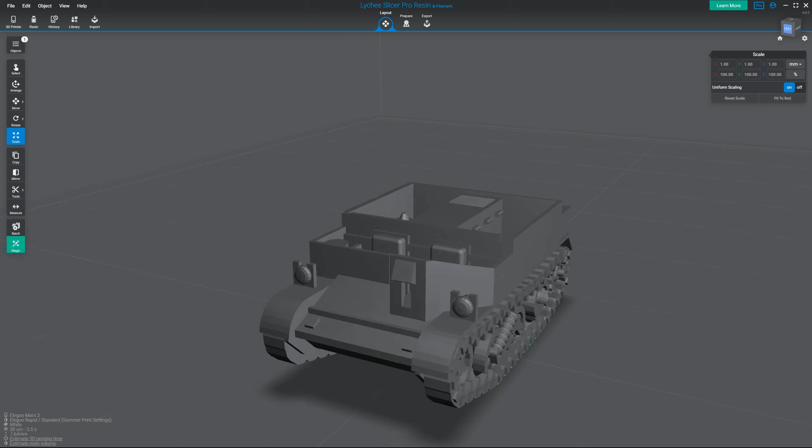On the screen in front of me I've got Lychee Slicer open, but everything I'm going to do today you could do in Chitubox if you use that program. What we have in front of us here is not one of my creations. This is a Universal Carrier by Wyndham Graves.

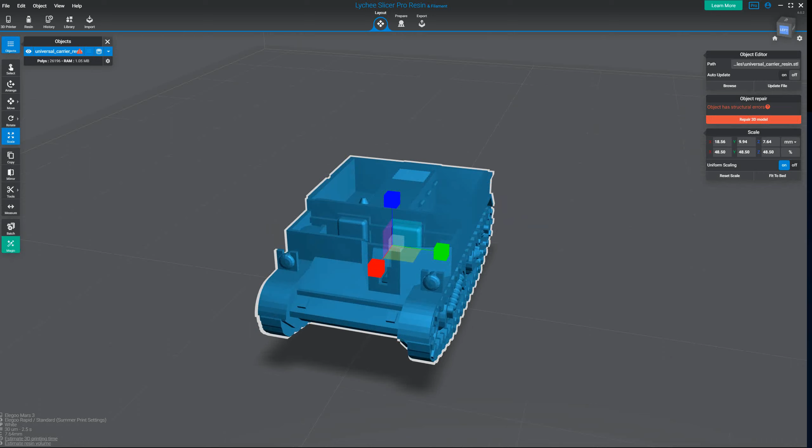I will put a link to the model in the description. I can't remember the exact name he has it under, but it's something like Easy Print Universal Carrier. It's in 1/100 scale natively, so I've put it to 48.5% to match my figures. This works out at 1:206, something like that. So this isn't 1:285 scale. That would need to be smaller than this.

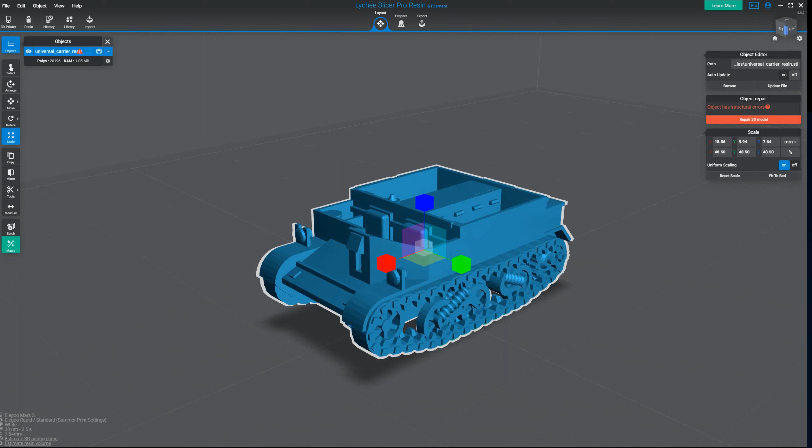But this is the most straightforward way to show you the figures without me having to downsize them as well. So my figures are 7mm from the bottom of their boots to their eye lines. I did the maths, and this works out at the right scaling from 1/100 to match that. But if you're dead set on 1:285, you can do the mathematics to scale the figures and vehicles around that.

Anyway, I'm getting a little off topic. What I'm going to do is add some crew members to this Bren carrier. It's my first time doing it, so I hope it works despite me being unscripted.

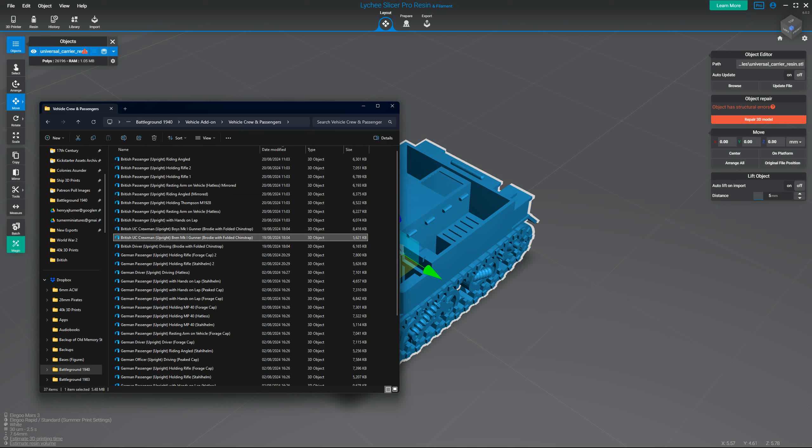So here is the contents of my vehicle crew add-on. I'm going to drop in a Bren gunner for the Universal Carrier there. And I'm going to drop in a driver. And I'm going to drop in passengers. Angled passengers are the ones that should fit in the Bren carrier in the back. Where's the mirrored one? There's the mirrored one.

Okay, hopefully this should be everything we need to get this all crewed up. So just going to put this in the middle. And we're going to want to rotate these guys 90 degrees. Yeah, that looks right. So what we're doing is positioning these guys in the vehicle, and then we're going to export them all together as a joint STL. This is going to be done by eye, not scientific, so there will be a bit of room for margin of error.

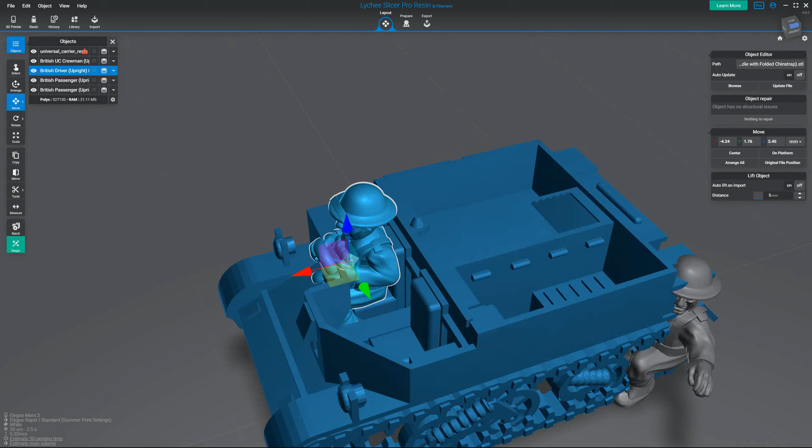Now, I think you'll want to look under the vehicle from time to time to make sure the feet aren't clipping through, but if the feet get eaten by the bottom of the vehicle, I don't think that really matters. About there looks right to me.

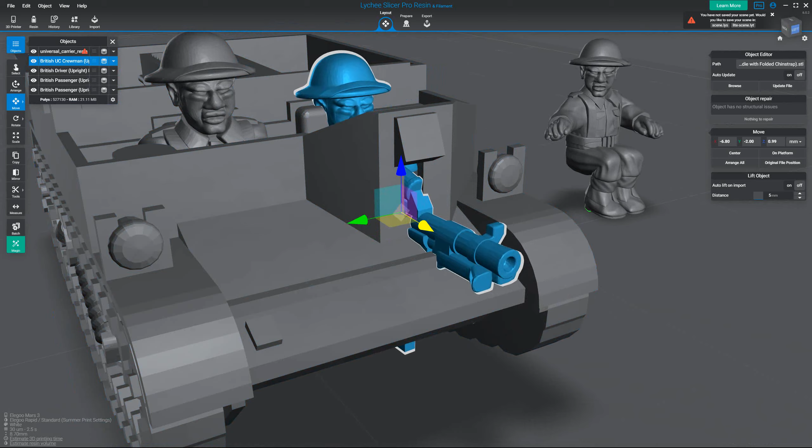Okay, now we're going to move in the Bren gunner. With the Bren, it's pointing 5 degrees to the left, so you don't need to be dead on center. That's just so that the butt doesn't look weird. I wanted to have more room to work with the butt. Because the size of the weapons is a little exaggerated, it isn't quite a perfect lineup.

Again, you can just rescale the figures. About there looks right. I'll want to make sure he's about level with the driver though, or I can bump the driver up to be a similar height to him. Actually, that looks okay. So there's our driver and gunner.

And now this is the bit I'm worried about, because I have to confess I've not actually fit these in yet, so this is the first time doing it. I might have to make tweaks to these STLs. Let's do him 45 degrees. Yeah.

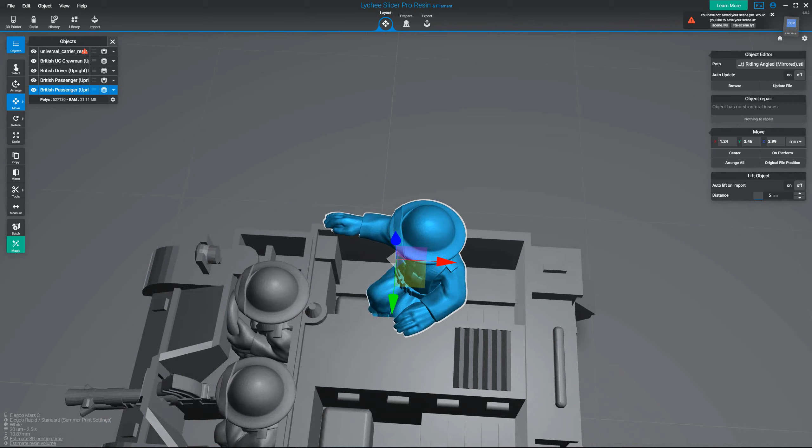I'm sure someone who knows more about universal carriers than me is going to be fretting that they're sitting on something sensitive or whatever. The Warlord Games model for a Bren carrier has them sitting here, but I see that there's actually a box in the way there.

Might need to revisit the drawing board with this one. I promise in the final project I will have the arms positioned correctly for the Bren carrier. I did actually pose this on a Bren carrier model, but it was a different one. I think he'll need some new legs. But let's just pretend this guy fit properly, and I will have this fixed ahead of the final Kickstarter.

I wonder if I sat like that, if he was sat on the other side. No, I think the way it is, yeah. Probably burning his hand on an engine cowling there, but... like so.

Someone better at maths know how I get the 45 degrees from there? Is that about it? 45 plus 1. I don't know, I'm doing it by eye because I don't want to waste your time getting me to just watching me be confused, which is about 90% of the videos I make, to be fair.

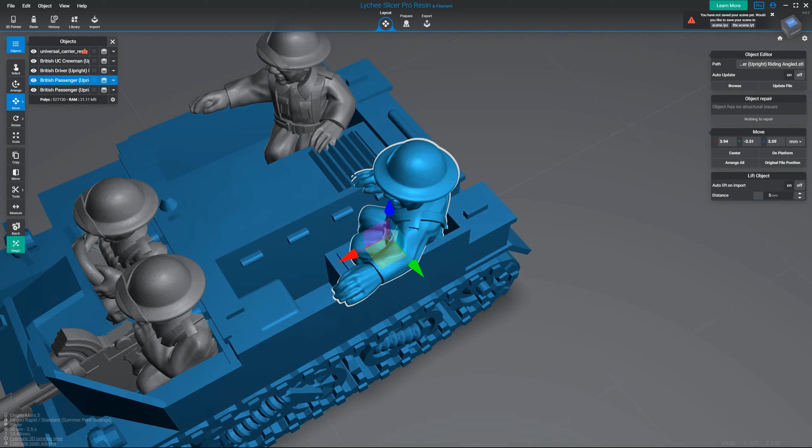Okay. We have got other sitting figures. I see there are some seats there. I'm really betraying my lack of knowledge with Bren carriers, I suppose, but if we were to put in, say, this one - this is intended more for a truck, but I don't know if this would be good for a Bren carrier if we had this guy here.

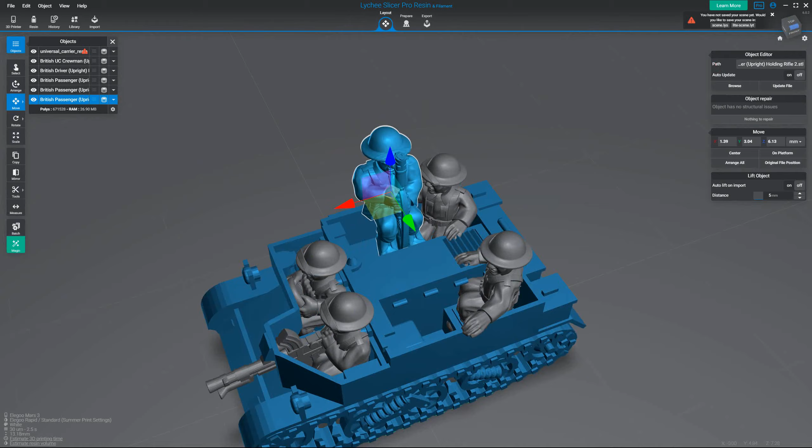Someone who knows what they're... oh, hello, we have two very friendly guys here. We could do it like that. But since I don't really know about these, I think I'll have to revisit the drawing board with the passengers. We can just remove the passengers and I will export like this.

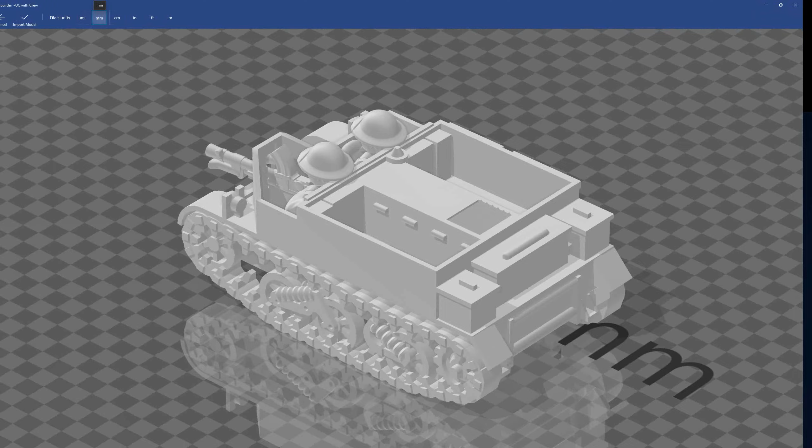So, very similar steps into your toolbox. If we decide, oh yeah, we like this vehicle with our crew, we just go and export. Export to 3D file. Desktop, UC with crew. And then if I go to the desktop, hopefully you can still see this, open this up in 3D Builder. There we go, and when I make sure millimeter is selected, click import model, I can repair it from here.

Not sure if this is necessary, but this will merge them as a single STL. But there you go, that's how we get a vehicle with a single crew. How about I show you a German vehicle now? Even more scope for things to go wrong.

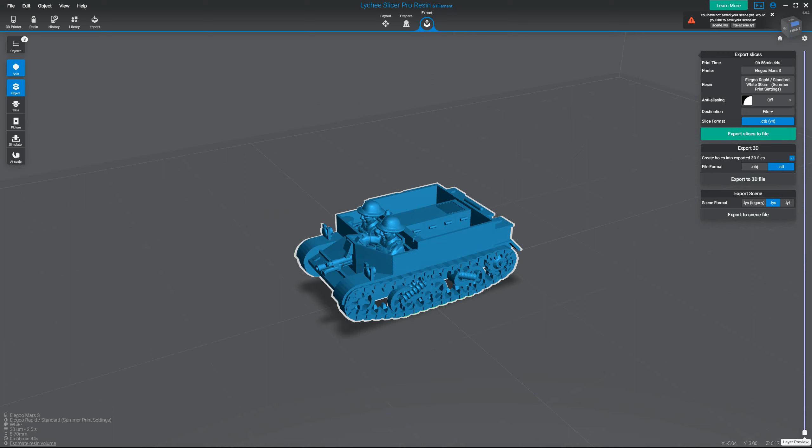Let's bring up my files. And if I go on Dropbox: West, Flames of War, Team Yankee, World War II, Tiger Race, Hanomag pack. Yes, this is what I want. Okay, so let's get rid of our British boys here, and drop in our half track.

And scale again to 48.5%. There we go. Be careful with this Tiger Race model - I don't know if this will show up on a print, but it's got these loose bits of something here. In my Blender file where I was making these, I deleted those, but I forgot to update this STL.

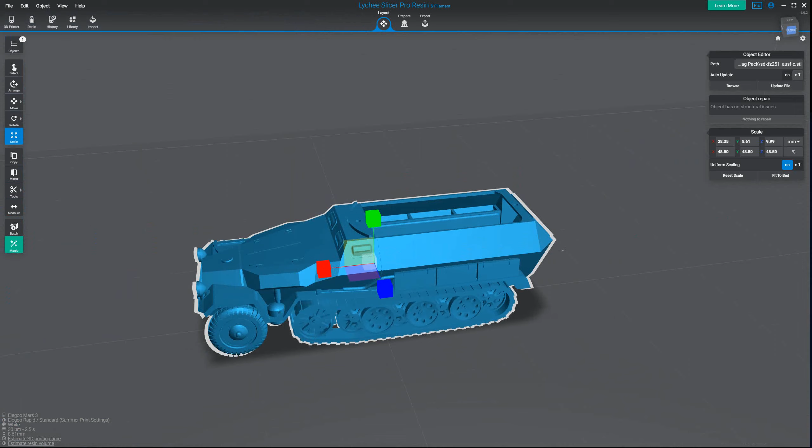We want crewmen for this, so if I go down to Germans, I've got German half-track gunner. And then, where's the driver? Driver - I've got forage cap driver there, but want him with the helmet on. He is going into battle after all. Here's our driver. Okay, import, rotate 90 degrees.

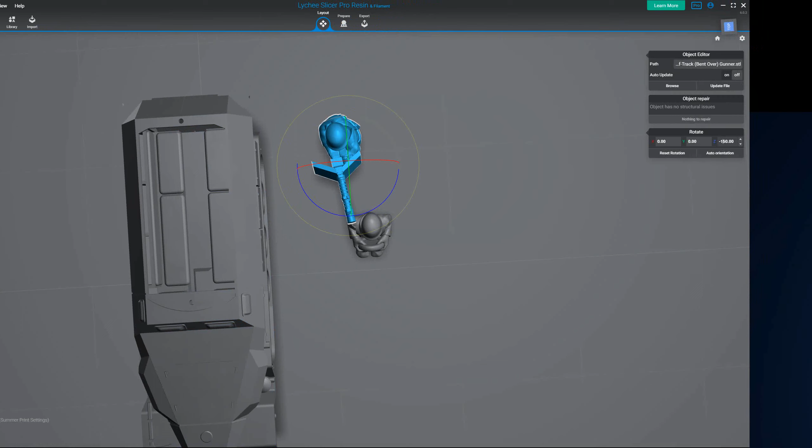And that's 155. Oh no, 155. 160. Just trying to get the gun straight. Ah, there we go, 160.

Now, this is actually my MG model using the gun shield from this original. Again, this is the Hanomag pack from Tiger Race, which I am using with permission. Mr. Wyndham Graves, I actually need to contact to ask him if I can use this Universal Carrier model. If he says no, I guess I'll have to delete this video.

Priorities, Henry. Should have done that first. We just want to make sure that this is clipping into the model just so it will print supportless.

It's difficult to see if the peg's properly lined up there. But good enough for now. So there's our gunner mounted on the top.

Yep, and driver, just insert him in. What side did Germans drive cars on again? It's the left, isn't it? Yes. I hope that's right.

Just get him so that the helmet isn't cropping through. To be honest, you're going to need to be quite the painting master to get your brush in there, aren't you? But yeah, there's our driver.

And we can add in some passengers. German passenger. Pose number 2 has them with the rifle between their legs. Pose number 1 has them holding it in their left hand.

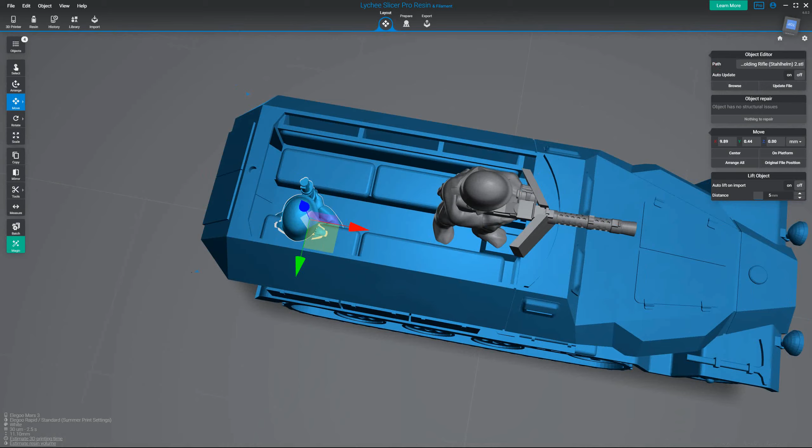So as I was saying, I have actually made an alternate pair of legs that doesn't jut so far into the aisle, which I designed for this half track because there will be some collisions with the legs otherwise. So, again, I'm sorry, you'll have to take my word for it that the final STLs will fit a bit more snugly than these ones do.

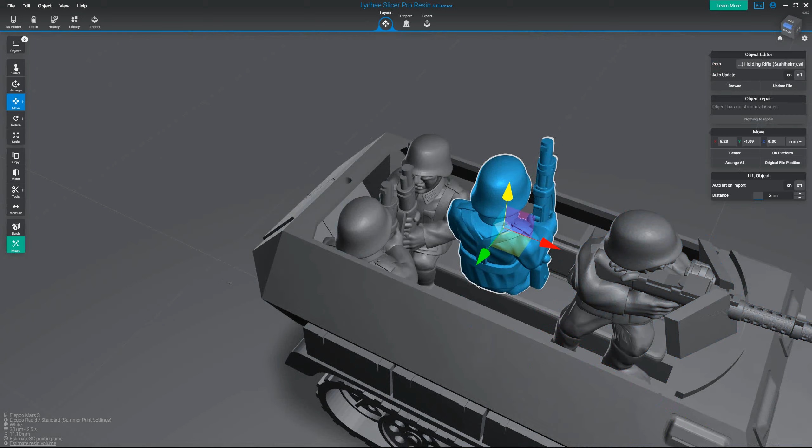If you want to see the other passenger pose, holding rifle Stahlhelm, it's this one, where he has it in his left hand. The logic being that maybe you could... what's the height on this? 2.79. Being that maybe you could interlock them like this, then they'll fit. That was what I was thinking.

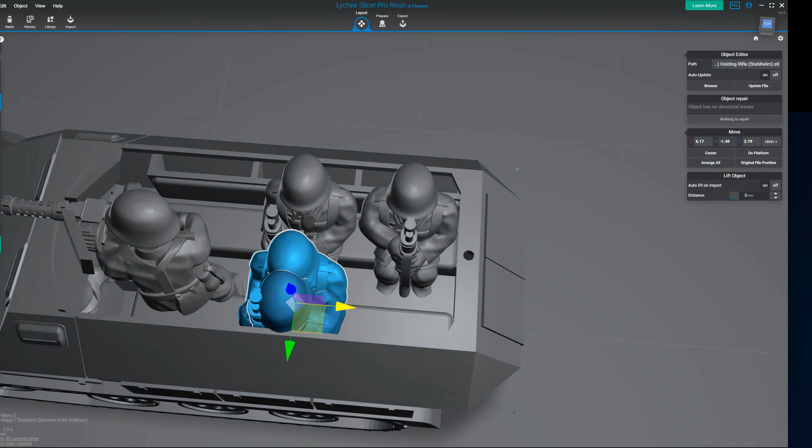Let's move this one to the other side. What's your X? 6.17. Oh no, Y is what I wanted. Whoops, Y. And then rotate him. What's your Y? Oh, 0? No, that's rotation. Whoops, 1.49. Yeah, oh, tell you what, that actually fits. Don't it? That don't look so bad.

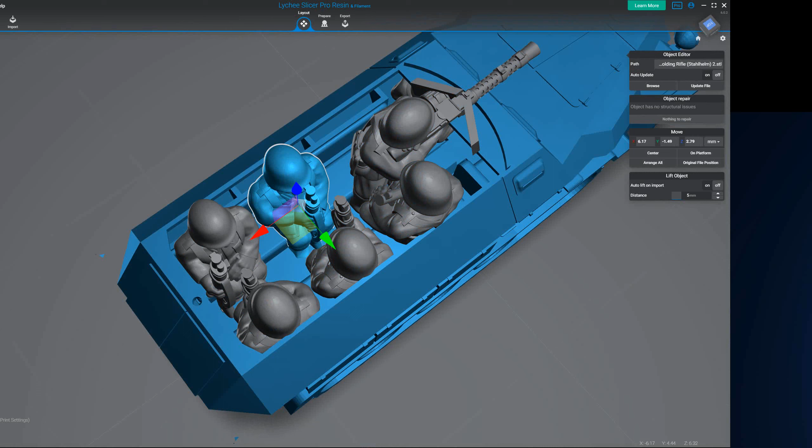Okay, and we can throw in a guy with an SMG. Where's our SMG dude? Ah, here we go. Height, we had 2.79. Y, I'm just copying for uniform coordinates. There you go, there's your half track with crew. That went better than the Bren carrier went, didn't it?

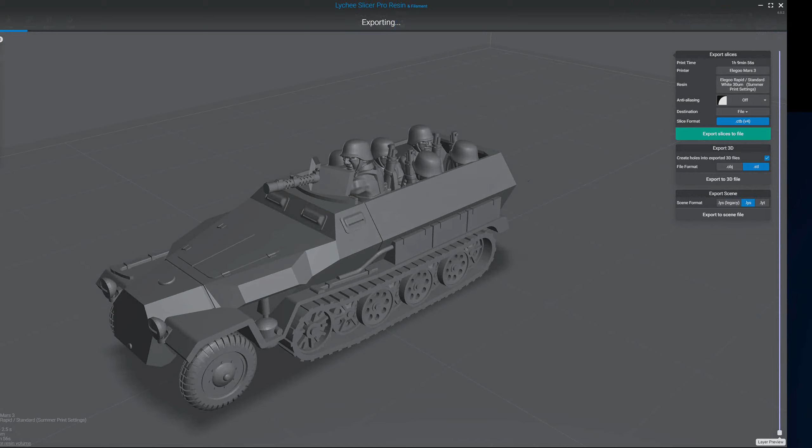So, export to 3D file. Half track with crew. Go to my desktop. Hey, oh, it doesn't even need repairing. There we go, German half track with crew. Don't look so bad, does it?

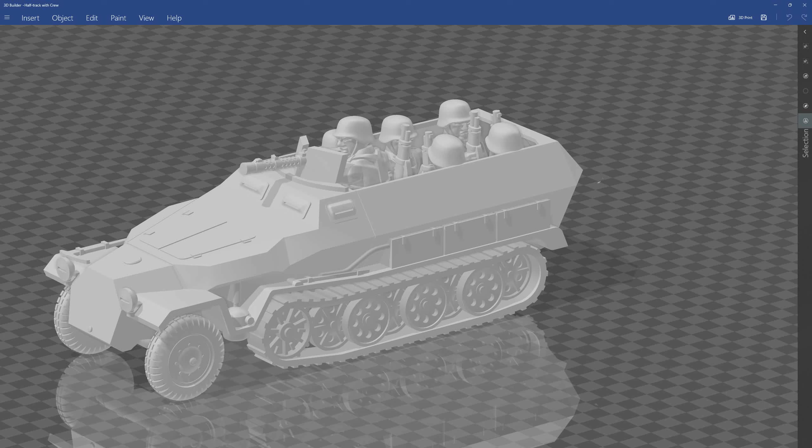Again, though, it would be worth going to Blender and deleting these. Tiger Ace said that I could include his stuff or links to it with the products, so I will ask him if I can fix this for him and include that. He does also offer a rear MG, which I realise I haven't mounted. I will need to test if this front figure can fit on the back, but I think it's very unlikely that people are going to want the rear gunner or the rear gun station to be armed. I think you want it on the business end, don't you?